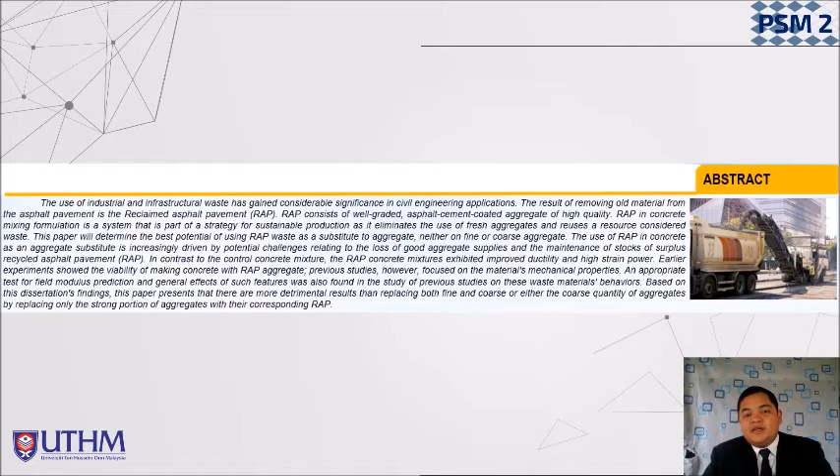In this section, I have explained the introduction of RAP and the result of the test. We can conclude in the abstract whether the potential of using RAP aggregate in concrete mixing is good or not. Let's move on to chapter 1.

As we all know, concrete is the oldest and commonest construction material in the world. Concrete production has come from a long time ago. For example, the Assyrian and Babylon exploited mud as cement in their concrete, whereas the traditional Egypt used sedimentary rocks and mineral cement. Concrete characteristics were adjusted since Roman and Egyptian times once found to add volcanic ash to the combination in hardening underneath the water.

There is some concern that the days of infinite supplies for concrete surface of high quality virgin aggregate have ended. Overall costs also account for 20 to 30% of concrete pavement material cost. The rise of aggregate expense is primarily due to higher energy usage during aggregate output and shipping.

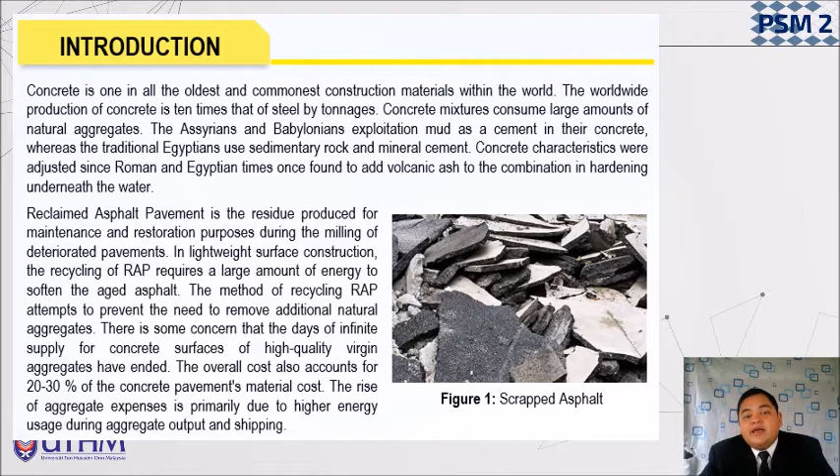For the objective and the scope of study, the purpose of the study is to determine the potential of reclaimed asphalt pavement in the normal concrete mixture as the aggregate substitute. Second, to compare previous study or research to get which type of aggregate is suitable to use.

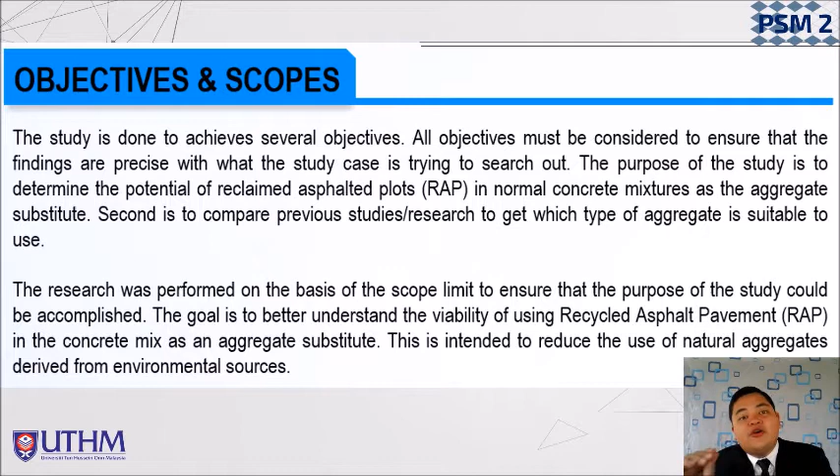The research was performed on the basis of the scope limit to ensure that the purpose of the study could be accomplished. The goal is to better understand the viability of using reclaimed asphalt pavement in the concrete mix as an aggregate substitute. This is intended to reduce the use of natural aggregate derived from the environmental source. From this, we can prevent the usage of raw material in the concrete mixture.

For literature review in chapter 2, we will talk about the previous research. We point out what material is used and the percentage in the previous mix design for the reclaimed asphalt pavement used in this study. Property concrete is related to reducing pollution and carbonic acid gas emitted throughout the concrete production. Features available on concrete: heat resistant, do not burn, do not rust, harden, freeze water present.

Numerous other materials have been proposed as substitute for conventional ingredients of concrete. More than 100 million tons of reclaimed asphalt pavement have been obtained for reuse in the US during 2018, saving landfill 61.4 million cubic yards. Concrete mix design will be designed according to the design of normal concrete mix recommended by FIP. Grade 30 concrete at age of 7 and 28 days to be created using this method.

Flowability is among the latest characteristics of concrete mix that is a significant concern. A limit of 40% RAP is permitted in the surface mix under the new Public Building Commission requirement in Taiwan. That is the example of the percentage usage of RAP in Taiwan itself. The researchers from Taiwan used the mix design to determine the concrete potential.

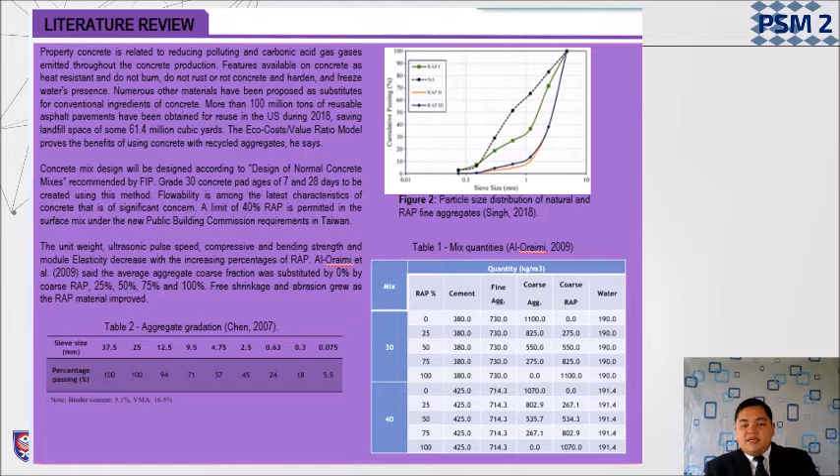From the researcher Al-Oraimi, the coarse aggregate fraction was substituted by 0%, 25%, 50% and 75% RAP. Free shrinkage and abrasion grew as the RAP material increased. As you can see, figure 2 is a particle size distribution of natural and RAP fine aggregate, from the researcher named Singh from 2018. Then table 1, mix quantity, is from Al-Oraimi itself. As you can see in the table, the percentage of RAP used and the quantity used for the mixture.

For example, I put the title related to this study, then the results show many studies previous researchers have done using this material. Second is the internet public library, also the same. Next one is the online article, for example Mendeley, Google Scholar, ResearchGate, Science Direct, and others. From the online articles, I have gained more articles and journals about previous studies of RAP usage.

Second is the related journal or previous thesis. From the previous thesis, I make a reference from a previous student thesis that I obtained from the supervisor. Then the UTHM library also provides e-thesis, a soft copy of the thesis, which we can see only for reference. Then other universities, for example UPM, UTM, USM, and others.

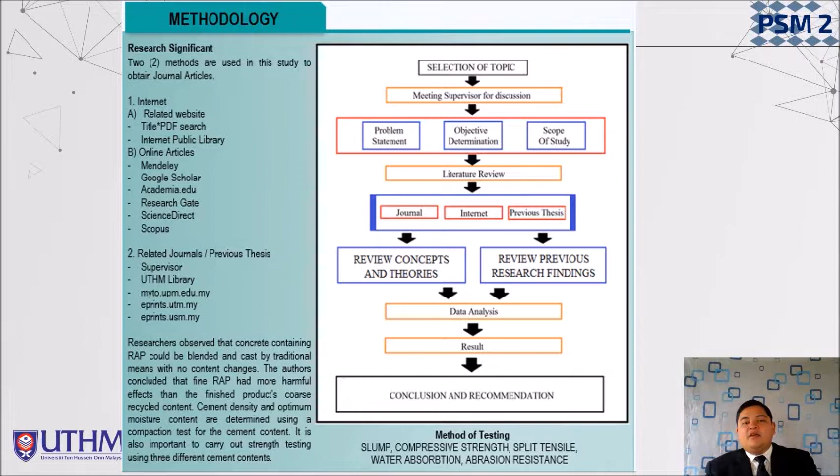Okay, let's go to the discussion. To summarize all the results from all the journals that I have read on the potential usage of RAP as a substitute for aggregate: concrete mix design will be designed according to the normal concrete mix design recommended. Fine RAP aggregate partly replaces fine natural aggregate after figuring out the best aggregate skeleton.

Some researchers claim that RAP does not affect shrinkage behavior, while others contend that RAP continues to decrease PCC, Portland cement concrete, shrinkage. One potential alternative for RAP as an aggregate replacement for Portland cement concrete is for reducing the volumes of extra RAP.

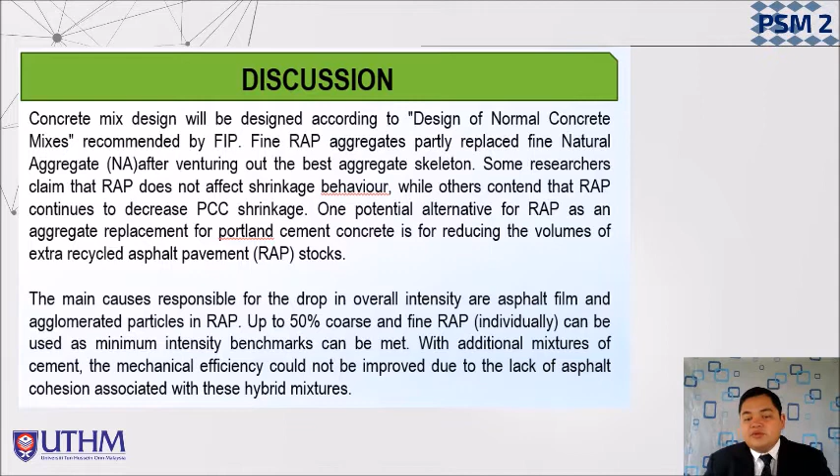The main causes responsible for the drop in overall strength are the asphalt film and agglomerate particles in RAP. As I mentioned earlier, the strength decrease in the concrete mix is caused by the material called the asphalt film. Up to 50% coarse and fine RAP can be used as the minimum strength benchmark can be met. With additional cement, the mechanical efficiency could not be improved due to the lack of asphalt cohesion associated with this hybrid mixture.

Alright, we have come to the final chapter, which is the conclusion. This study was carried out to determine the best potential of using reclaimed asphalt pavement as a substitute for either coarse or fine aggregate in concrete mix. The asphalt film and agglomerate particles of RAP have been established as the main factor responsible for lowering the overall strength characteristics of the concrete mixture. The use of this aggregate in concrete seems to be an innovative solution. The advantages of using it as a substitute for aggregates can be summarized as follows.

First, RAP is a waste material. Indirectly, using this material in concrete can reduce the material cost of the raw material we use in ordinary concrete production. Instead, we use the recycled material, so we can cut the material cost itself. Second, it can reduce the problem of aggregate sources. As I mentioned earlier, this material is a recycled material. It affects the raw material if we do not use this recycled material.

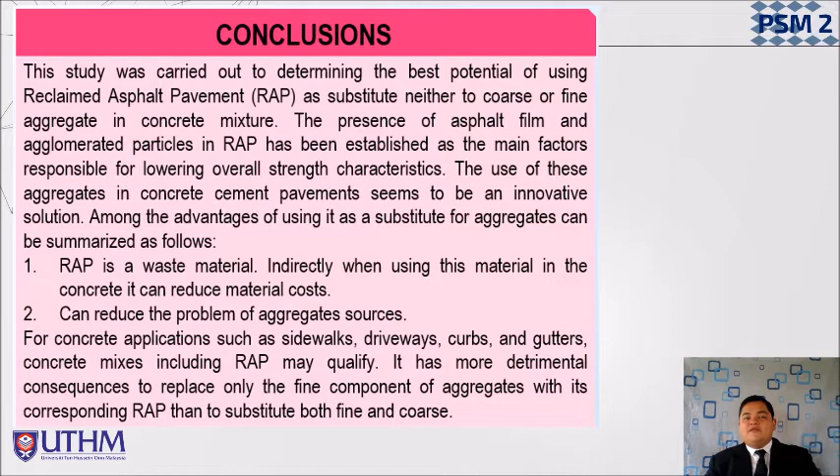For concrete applications such as sidewalks, driveways, curbs and gutters, concrete mixes including RAP may qualify. It has more detrimental consequences to replace only the fine component of aggregate with its corresponding RAP than to substitute both fine and coarse. I can conclude that the usage of RAP in concrete mixture is good for non-load bearing structures.

The recommendation for upcoming studies: based on the studies done, we can see that using RAP as substitute aggregate may have problems for large structures. This is because the decrease in strength properties makes the concrete not suitable for large structures. The first recommendation is to investigate improvements to the properties of RAP concrete mixture so that it can be applied to a large structure or building.

Second, adding more additive materials such as silica fume to improve its properties. Maybe with some chemical admixture the properties of the concrete mixture may be improved slightly. Then the third is the overall cost of RAP concrete production, because the previous researchers didn't mention the cost of RAP concrete production. So I hope further studies can tell the exact cost of RAP concrete mixture production.

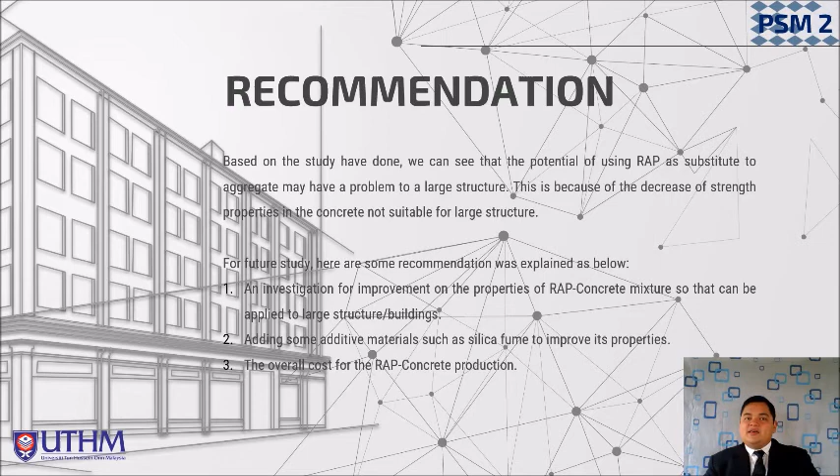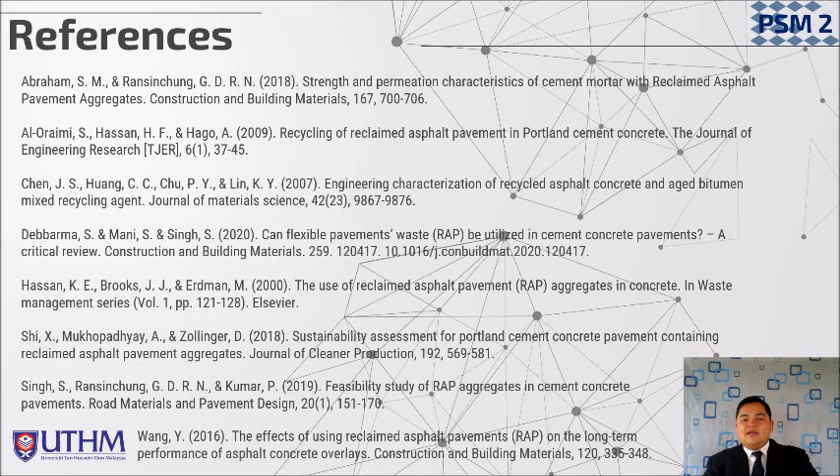These are the references from the journals that I have obtained. For example, first Al-Oraimi, the recycling of reclaimed asphalt pavement in Portland cement concrete. And Debbarma, can flexible pavement waste RAP be utilized in cement concrete pavement? And Hassan, the use of reclaimed asphalt pavement aggregates in concrete, and many other journals with related titles on these studies.